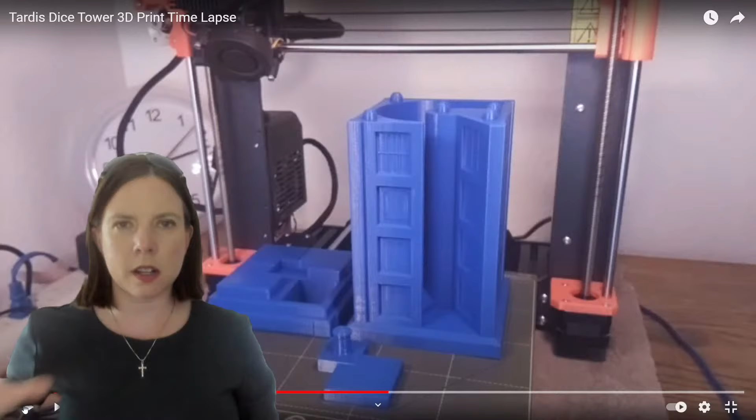Another thing I want to move on to is that I want to look at the industrial applications. As we move on, we're going to particularly look at where this arrives at in terms of the stock market, but we need to understand the trajectory of the industry before we can understand its future. So there's a lot of applications, maybe it's modelling, from the point of view of modelling houses, from an architecture point of view and so on.

Of course, manufacturing as well, if we can use a material - particularly what has been used to date in 3D printing has been plastics. So if you can use a specific material with a view to delivering an outcome, this can be extremely precise. You can have extremely narrow print runs, they can be very, very specific. In fact, they can be unique, they can be customized, they can be tailored. So we also, of course, have that application.

But one that is being talked about a huge amount is the biomedical industry. What if we could print pieces of people's bodies? For example, could we print prosthetic hips, knees, shoulders? One of the companies most well known in the world for this is Johnson & Johnson, and the specific company within Johnson & Johnson would be Depuy Synthes. Depuy Synthes, as the name suggests, prints prosthetic parts, and therefore they can be extremely tailored and customized so that they can be placed into somebody's body.

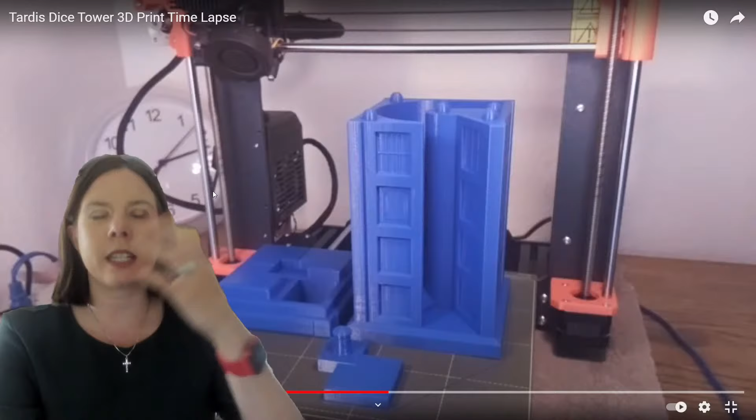But maybe we shouldn't just think about the end outcome, but also think about the inputs themselves, because if Depuy Synthes can print parts of raw materials, or print the raw materials themselves, with a view to then adding them to other sourced products, that dramatically speeds up the supply chain and can decrease cost depending on what happens. It also reduces risk in the system as well. So biomedical engineering can deliver the actual outcome itself as well as feeding into the inputs along the way.

However, what I think is also very interesting is I just now want to play for you one other quick video, but this time I am going to turn on my sound.

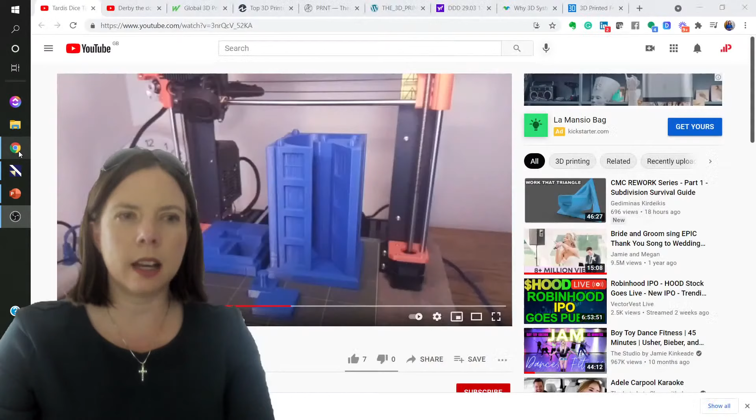Let me play this for you. So this is about prosthetics, but not in the way you might think. Let me play this for you now. And even I can't hear that. So therefore, I'm just going to make sure that we can play that properly. There's our culprit. Now, there we go.

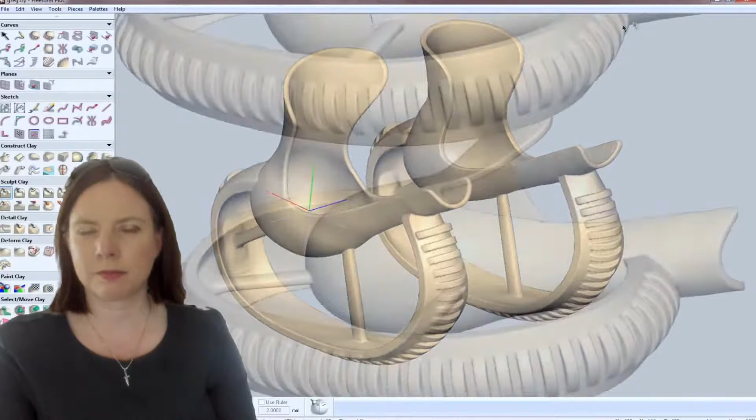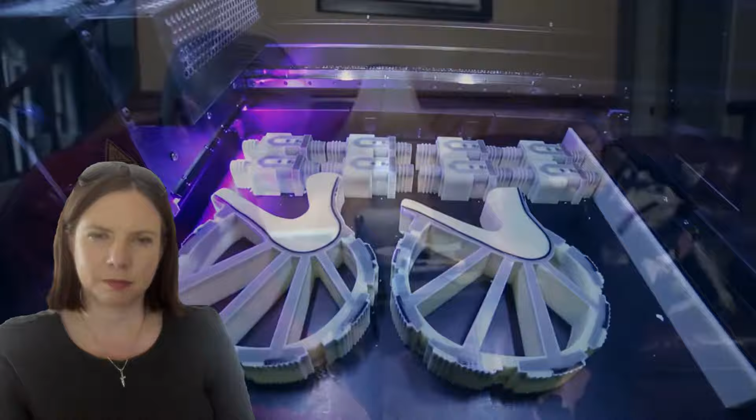And that is Derby the dog story. The point I wanted to bring to you is that biomedical engineering, of course, is something that can apply to lots of people in lots of different areas. So on that note, let's go back and consider a couple of other points - the difference between traditional and 3D printing is, in essence, one is subtractive and one is additive.

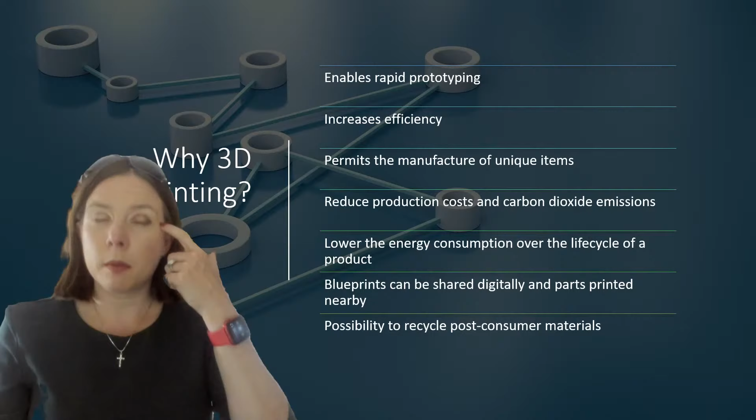So why is 3D printing something that is of benefit to the world? Why is it that companies are finding that customers are willing to pay for it? First of all, it enables rapid prototyping. If you can make an extremely tailored, customized print, then change one thing and amend it and print again, that does enable very rapid prototyping. Similarly, if you want to visualize more than just two dimensions, like for example the plans of a house, it really does enable rapid prototyping. It increases efficiency, as I mentioned, from the point of view of being able to add things in as opposed to taking things apart. And it also allows for a lot of pivoting and testing along the way.

It permits the manufacture of unique items, like you saw there in the case of Derby's paws, in terms of biomedical engineering and so on.

Now, here is though where we do need to be a little bit critical, and we need to question the clean tech nature of 3D printing. Does it actually reduce production costs? Yes, it does, because you have got far less waste. There's no doubt about that. But actually, on balance, it does reduce carbon dioxide emissions because of two reasons. Number one is there's less waste in actually printing something as opposed to taking something and chipping away at it.

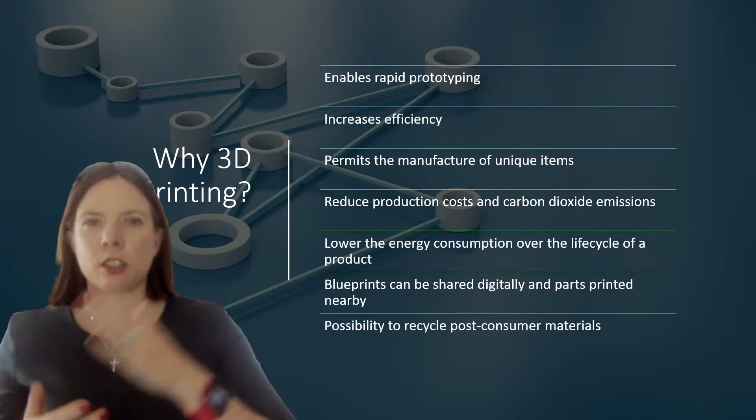But number two, and this is where things are really different, and we do have to think about this and the impact of retail, which I do want to talk about as well. When you think about transporting X to Y, for example, I have a microphone here beside me, my Yeti microphone. I have it all the time, I bring it everywhere with me. Right now, when I've been traveling over here to the UK, I brought it with me.

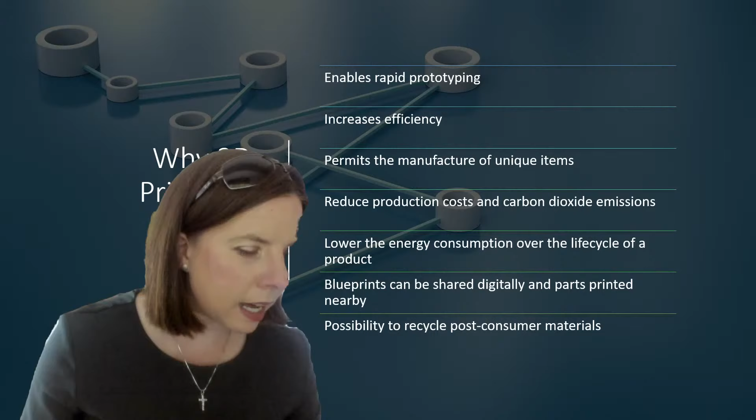Well, then we also have to think about what exactly is going into these 3D printers. What are the materials that can be used? The reality is that you can print anything theoretically, but practically you need to make sure, just like paper in a 2D printer, that whatever you're printing needs to come through that surface. And that also has its own impact.

But since you're only adding, you aren't subtracting from anything, there is less waste. Apart from that, you're using a different type of material that can be smaller to add in, basically powder that is added in and that sticks the 3D printed material together. At that stage you can use much smaller materials, and as a result you could then therefore use...

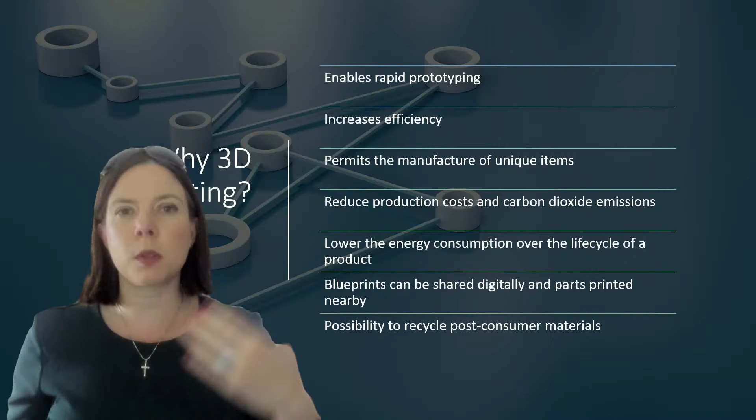Post-consumer materials, in other words things that have been used already. So it ties right into the circular economy. So on balance, 3D printing can actually be quite a more sustainable, environmentally friendly technology.

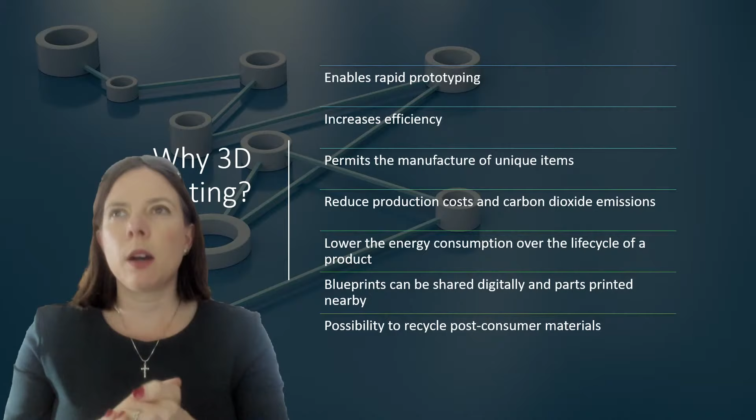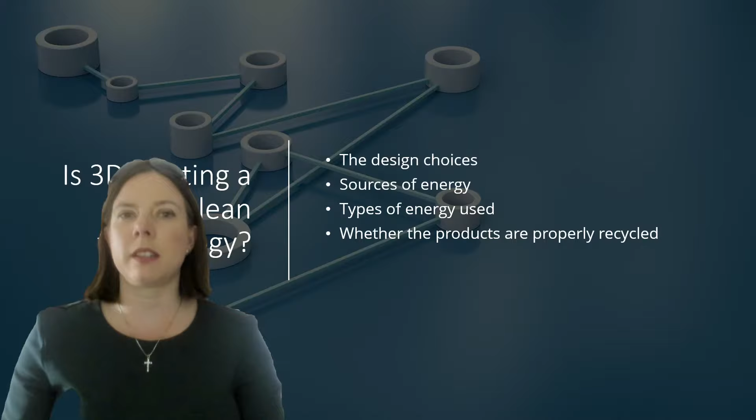It can be. Now there are also criticisms of it, and it's important to remember those as well. So the last part I'm going to talk about from a sustainability point of view: when it comes down to determining if 3D printing is in fact a clean technology, number one is the design choices - how you're designing the thing you're printing in such a way where you're minimizing the use of the actual material itself, as well as how you're sourcing your materials.

So what is the source of the materials that you're getting? Because what you may be feeding into that 3D printer may also be something you've had to extract out of something else. So it's additive when it gets into the printer, but what happens beforehand? The design choices of whatever is being printed certainly plays a role.

Then of course the source of the energy. Is the energy being used in the 3D printer something born of solar energy, or a fossil fuel, or any other type? That also will have an impact on the environmental impact, that will have an influence on it.

And then of course the types of energy that are used within the process, as well as the type of energy that is used in actually making the whole product a product, as well as what it's being used for.

So if you take something like biomedical technology, where you have a lot of individual things that have to be printed at mass with the view to hopefully suiting various different types of people, then you're going to have to print a huge amount of that batch or of batches so that they can suit individual patients or individual clients.

Whereas instead, when you are dramatically decreasing the amount that's being printed, but you're dramatically increasing the specificity of what's being printed, then in that case you're dramatically decreasing the amount of resources that it takes.

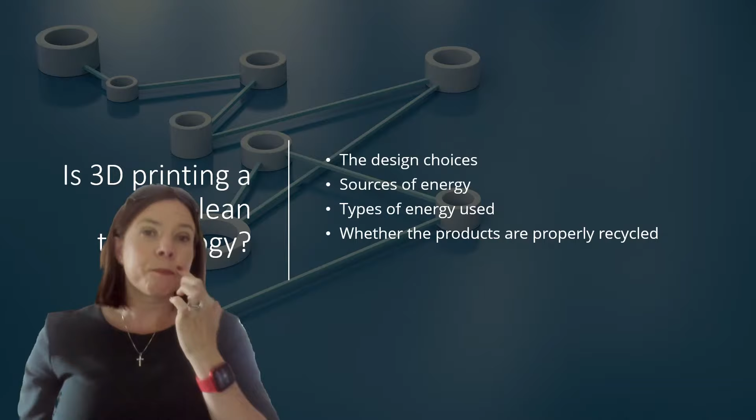And then finally, as always, whether the products are properly recycled. So I didn't want to come on here and talk to you today, in the spirit of the ESG and Tech Show, about a technology without considering its environmental impact.

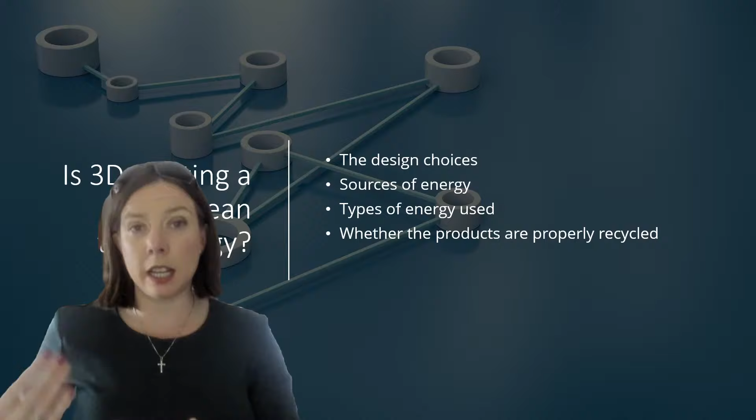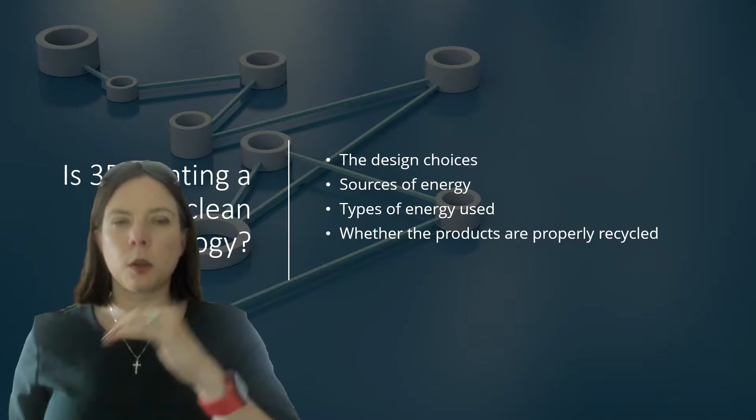And I think we also have to be careful on one point as we transition into the next part of today, because we now need to look ahead at the economic impact and particularly the economic future. Because as investors, we want to look at the industry, and the industry is going to be underpinned by its buyers, like consumers and industrial companies, and companies of various different sizes. So it's going to be underpinned by buyers, and underpinned as well by the macro economy and so on. But I will just make one point.

In doing my research for today's show, it's interesting how many people were talking about 3D printing from a novel and a fun point of view. And of course, that's natural.

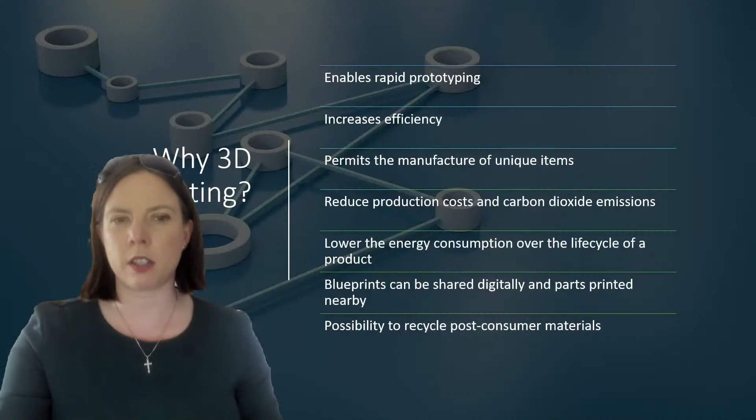That changed the demand for retail on an in-person basis. And instead, what dramatically increased was our demand for retail online.

I know I keep harping on about the fact that I'm physically in another country at the moment. I'm just so excited about it. I've been here for a week. I flew out of Ireland last Thursday and I'm flying back into Ireland Wednesday night. The novelty has just not worn off. I hope it never does, because it kind of didn't wear off beforehand, but now it really is pretty special.

If you think about it, we didn't demand airlines, or the services of airlines and all that goes with them - the packaging and food that goes into airlines, the diesel that fuels airlines, all of those things. COVID-19 did change the demand for what we had. We also changed our need for cars to physically go places, and lots of other places. That conversation is well worn at this stage, but the demand we had, and the production to service that demand, has changed as a result of COVID-19. Where that's going to go, no one is really sure, but we have to remember that some temporary changes will certainly form part of a permanent lifestyle.

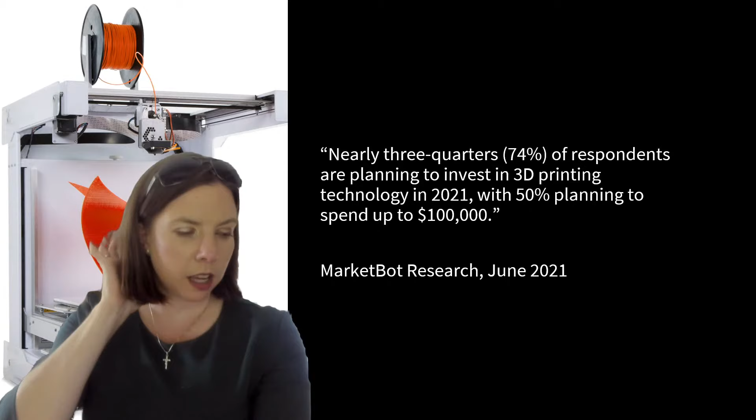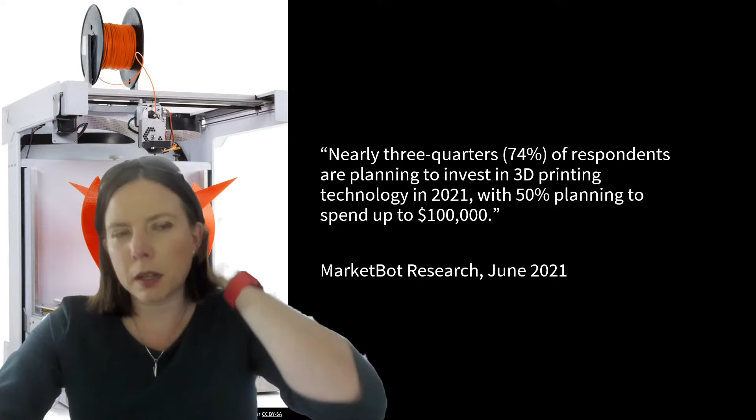As we move on, and because I'm conscious that time is moving on us, I want to get us to the stock market. This was MarketBot research that was done and published in 2021, and this was from a survey. I'm always conscious of surveys, and you should be too. As a trained economist, it's always important to look at the source of your sources, okay? MarketBot research actually conducted this across 1,200 responses in various different industries, and I thought that was important. I was looking for at least 4 figures of response. It was quite US based, but I was also looking for sector diversity within here.

So the key statistic I took out of this was nearly 3/4, or 74% of respondents, were planning to invest in 3D printing technology in 2021, with 50% of them planning to spend up to $100,000. Now if we're talking Aer Lingus or Boeing, or any of these companies, $100,000 is a dot on a spreadsheet, it wouldn't even be a number. But when you're looking at that kind of smaller company, where that can actually make a difference, this is what I'm trying to say: 3D printing is moving from novelty, specificity, testing, pivoting, learning, into how can it make the difference right into mass market. And if it does, where do we look to next?

Okay, so what I'm going to do now is minimize that, and first of all bring you over to an ETF that I found, called Print, PRNT. The reason I went looking for an ETF is, of course, any of you who've been on the show before know that what I like to do is give people a way to look at a range of different stocks together, in case they don't want to look at any one specific one. So I found this particular ETF.